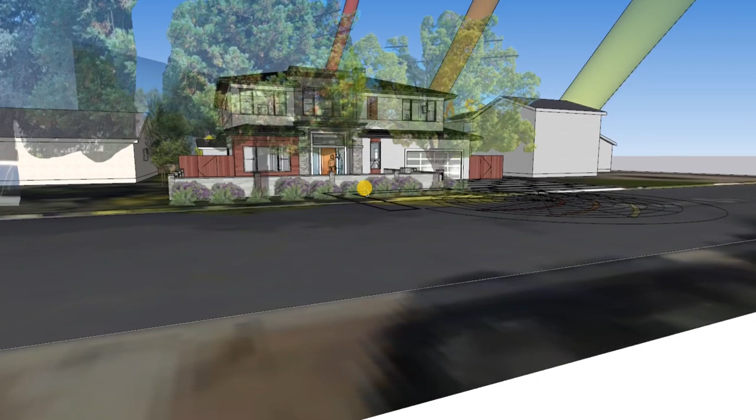So the front is relatively unchanged except for the window configuration. Per your request, I'm showing the window line you directed, and I think it's fine.

We've combined all the windows into sliders, except for at the mudroom where I had a casement. I'm now doing a taller window above a small awning window.

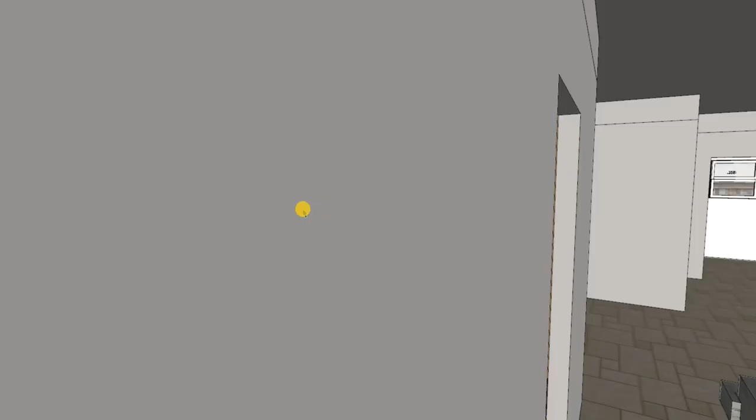So when you're inside the mudroom, and I know you said you wanted to make it a bigger window, I've gone ahead and made the window taller instead of going wider because I still do want to downplay this room a little bit on the elevation and let that mudroom zone be secondary.

The media room here has slightly taller windows than the rest of the bedrooms. These are 6 feet tall.

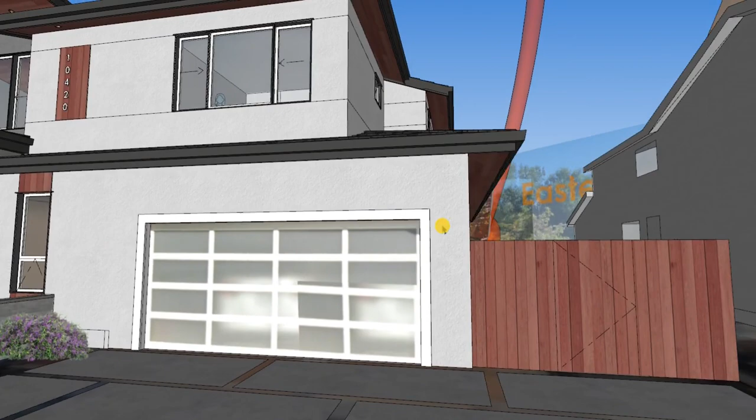No real changes here. I'm keeping the existing sliding window and the existing window at the kitchen.

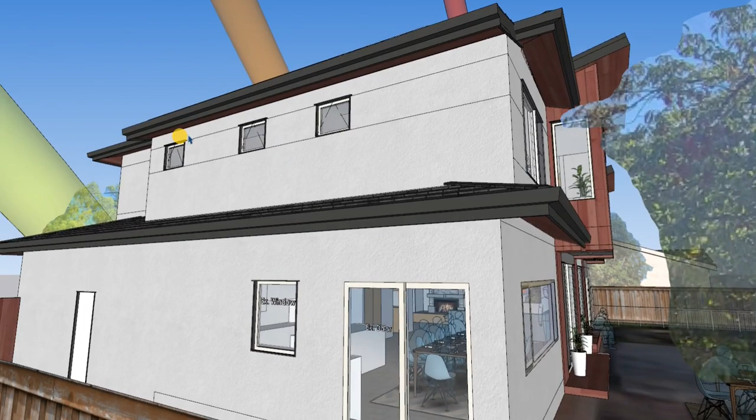These windows here have shrunk up a little bit to balance out the change at the closet. This window has shrunk down a little bit, and to keep things consistent in this bedroom, I wanted to bring this window height down just a little bit, but I don't want to go lower than 5 feet for the sill. So now, instead of being 30 inches tall, they're 24 inches. I think that's still fine.

Oh, let's back up a little bit, get a complete look.

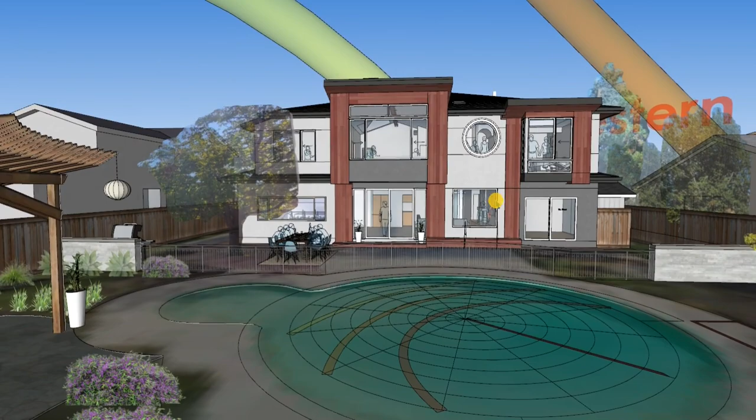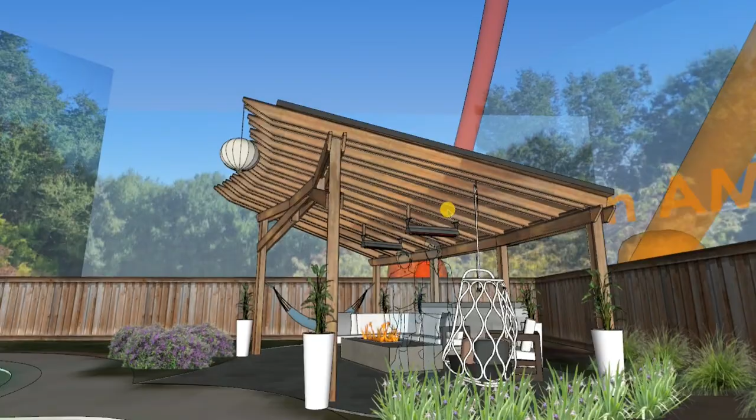So, no changes here at this curved pergola element. Still very awesome.

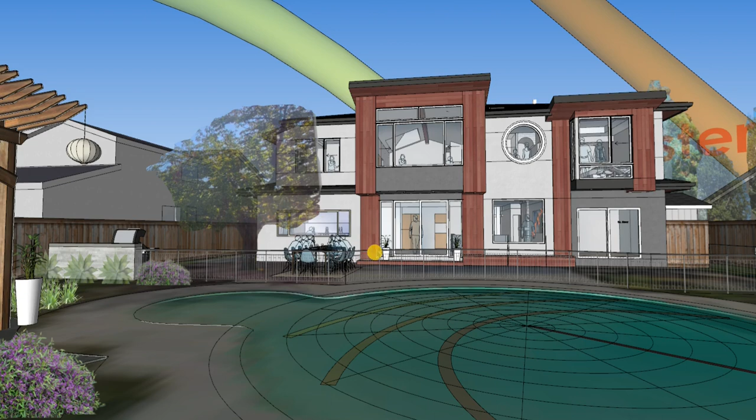And looking back here, the window design is both simplified and there's a lot more glass now, with some exceptions. So I'm showing the existing window here at the dining room. I don't see it looking great moving it up higher and building below it. I think you guys have indicated it's not an area that you're super convinced on needing to enlarge the glass at.

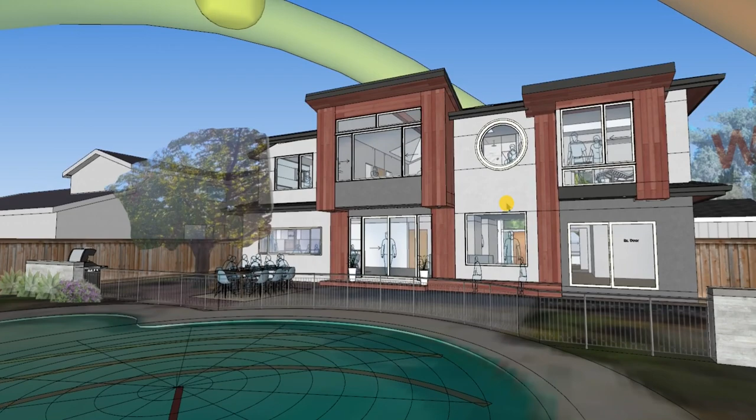So I'll show you what this looks like from the inside. But the other areas here at the downstairs living room, we have one big piece of glass. It's the biggest piece that the Tuscany line comes in. And this window at your bathroom is also the biggest 5-foot circle that they make.

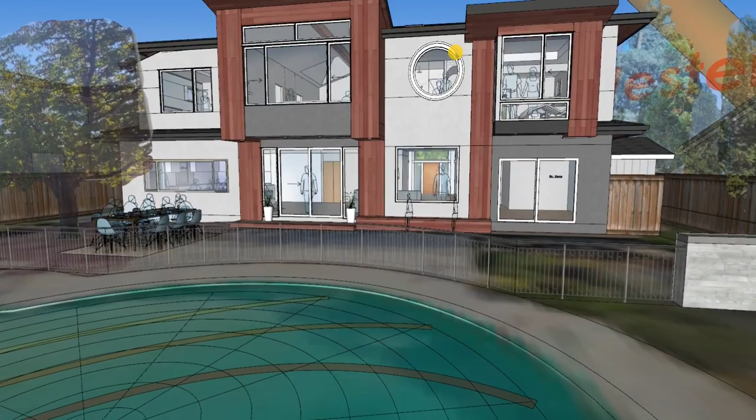And I think it looks fantastic. I started with smaller circles, but when I did the full 5 feet, it blows me away how awesome it is. Now, it is a fixed window, so we will be wanting to have an operable skylight here. But we'll take more of a look up in the bathroom later.

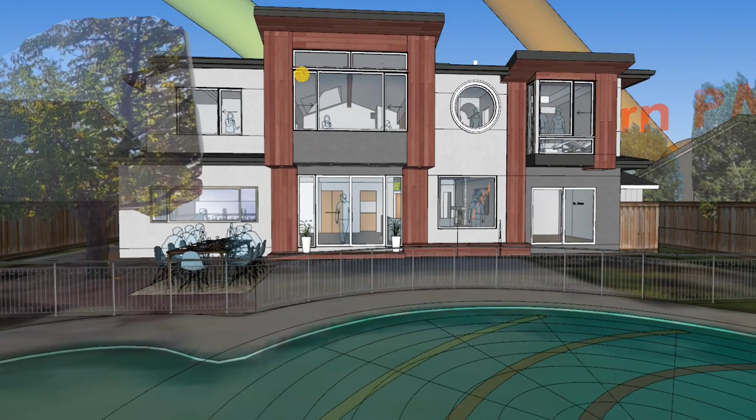This is the largest double slider available for the upstairs living room, with the largest available sliding patio door with some side lights on either side. This is the same width, 12 feet wide. This is 6 feet tall.

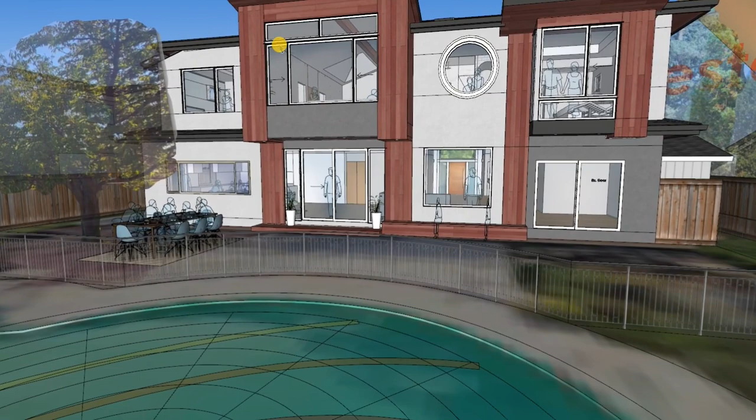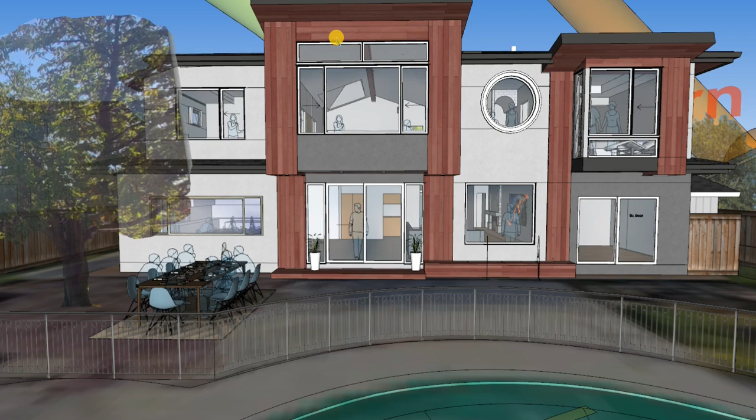And then I've brought that down to a 24-inch sill and then put 2 windows above. It seems like this is necessary that it be broken up into 2 windows. I'd love to see if we could explore the idea of getting it built as one piece, but I think that's just too big of a piece of glass for this product line. So splitting it into two windows here I think is okay.

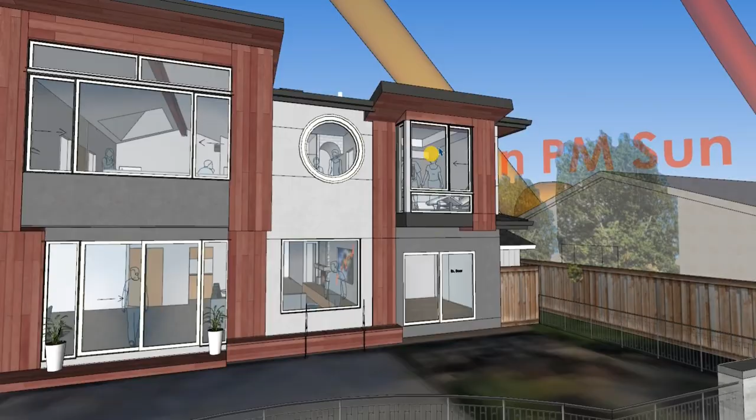And then not too much of a change at your master suite, other than the casement window has been changed to a sliding vent, a slider. And then I have done the treatment of bringing a small window down to the floor here still. So now it's only at your master suite that we're doing this treatment down to the floor. But I think it's worth it.

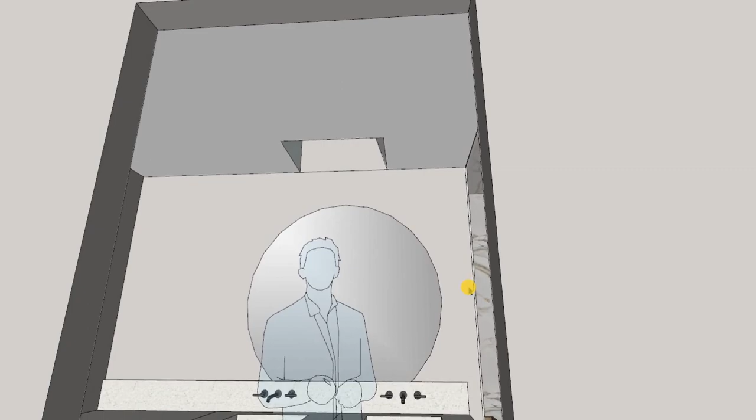And then looking into your master suite, just to give an idea of matching the circular window at the mirror for your vanities. And then if we do that, I feel like it's necessary to shift the skylight over to align here. That way, if we need to, we can crank open this window and get some ventilation happening.

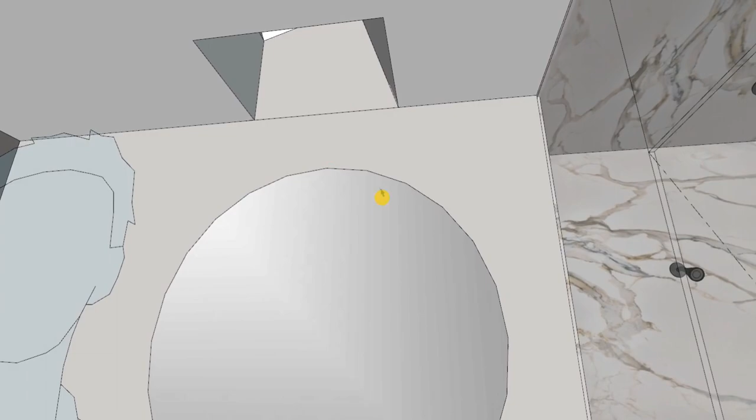Chiefly at this mirror that we might want to defog. Because at this size, and with this product line, this window would not be operable. This would be fixed.

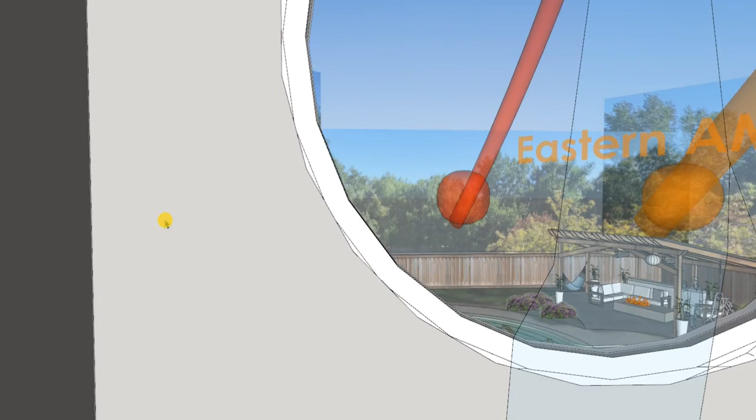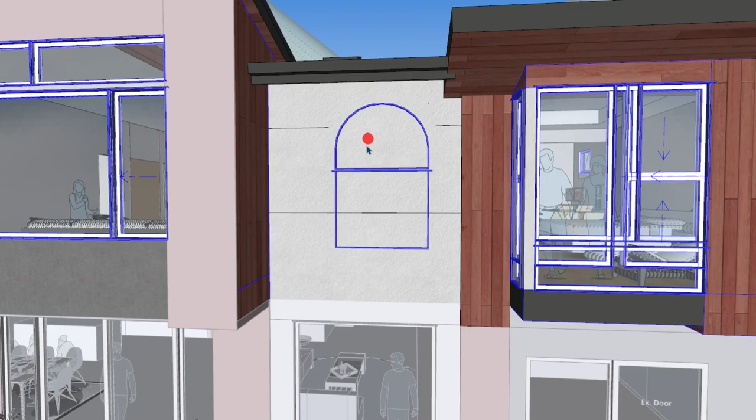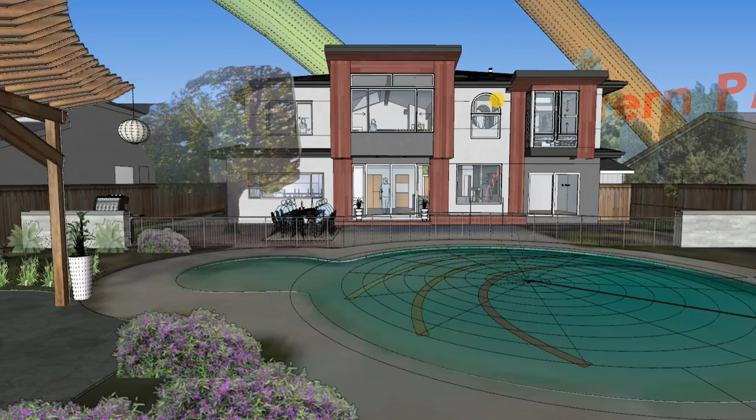Now, I did study doing some other window designs, something more inspired by... it's not perfect, but this isn't terrible. I don't have the inside wall cut correctly, but I'd rather see the full circle, to be honest. So I'd rather keep the circle here, rather than try to do a larger sort of combined window with an arch top.

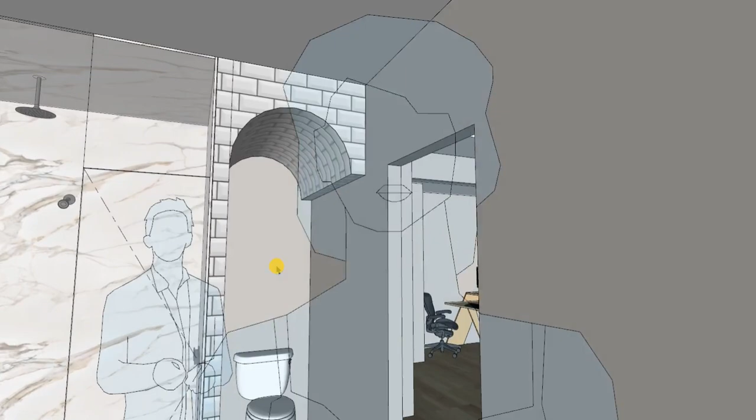Just for consideration, I think it might be really fun to do a little treatment at the shower wall. If we continue the shower wall tile around the corner and let that curve at the ceiling, this isn't necessary, but I think it might be a little fun, make this space feel a little extra special. But to be honest, maybe it'll remind you too much of a candy cane, so it's not necessary.

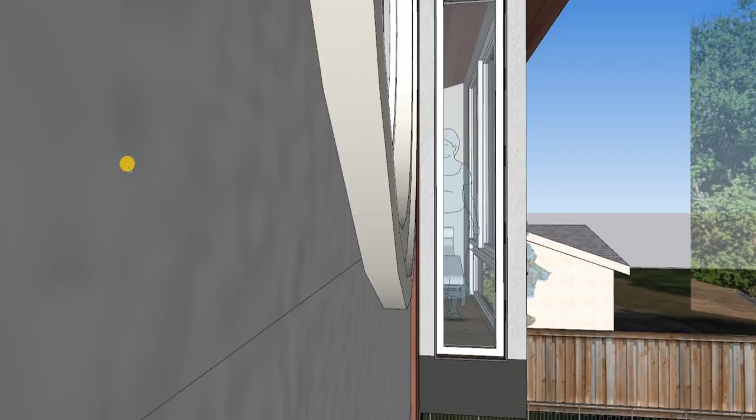But that change came about too, I think, just trying to bring the circle in a little bit more. Of course, we've got this fantastic set of circles reacting to your existing round pool already. But since you changed the skylight here, you asked me to. I think this is fun.

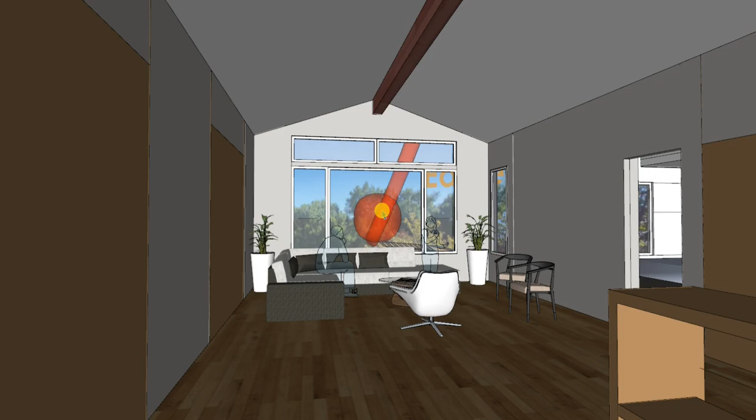Now let's actually continue around to the second floor living room, because I think you're going to really like the change here. I really like this new second floor living room space. It's a lot wider, a lot taller, and a lot more open. And to be honest, it's probably a lot simpler to build. The space has a lot less built-in shelving, but overall I think it has more glass, a simpler window system.

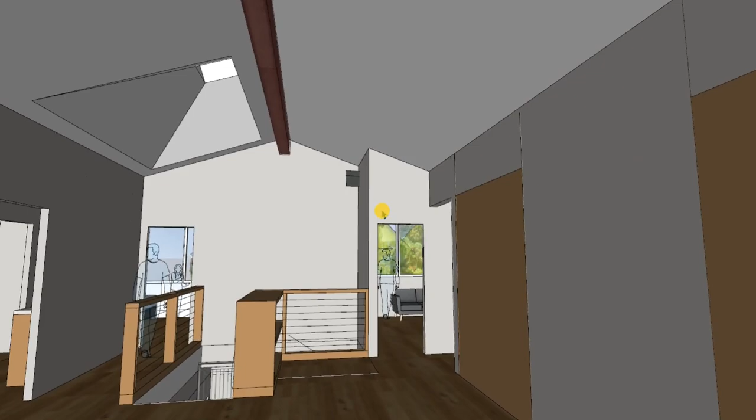I think it's a really fun opportunity to flare out this skylight so that when you're coming upstairs or coming down the hallway from your bedroom, it's just something really, really special happening here.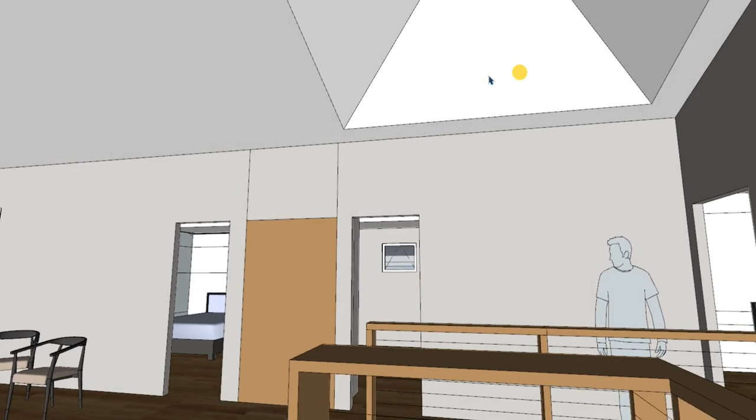So I think it's important to take a look inside this bedroom here. Now, I haven't finished all the interior walls, but this room feels okay to me. I think the trade-off of letting this be so open, because we shifted the closet, still feels to me quite appropriate.

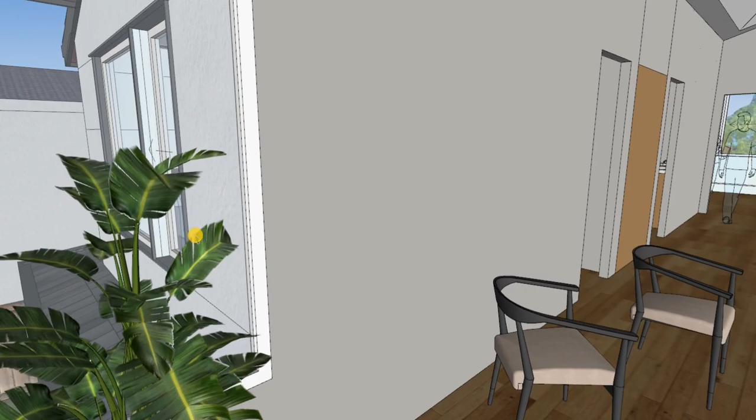And this bedroom still has a killer view, and a little bit of a view here to the window at the second floor. Now, since this has again gotten so wide relative to the original design, I do want to make sure you know that people can see into this bedroom if they're standing up against this window here.

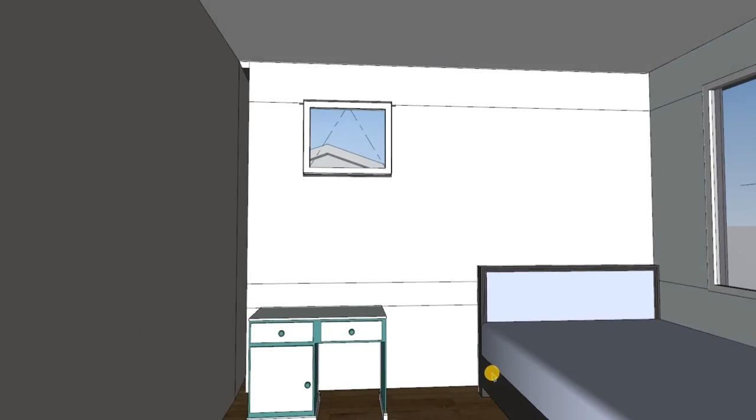This bedroom feels quite ample. There's a couple missing doors here on this closet wall. Quick peek in the media room.

Now, I haven't done the same thing where I've put a tall window above the lower windows, because given the proximity to the street and the fact that there's this roof here at the covered porch below, I feel like the right move is to raise the windows up. Keep it simple, raise them up. This is still, I believe, a 3-foot sill, which is quite normal, or 3'6", so it's 42 inches.

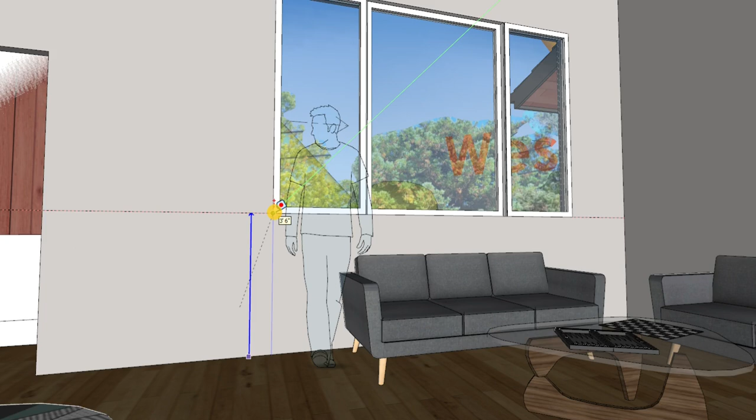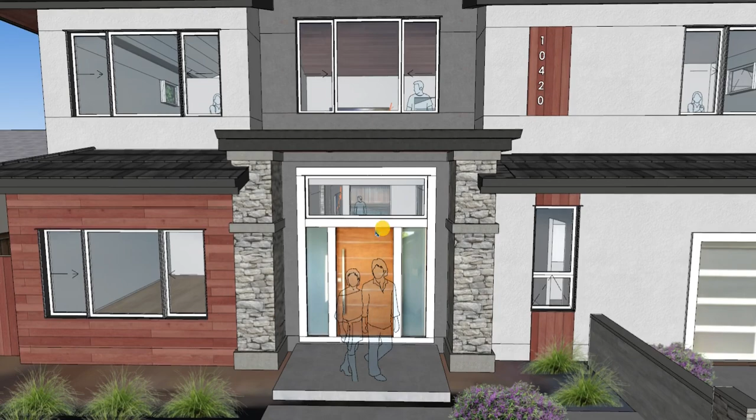So that's a little bit taller than I normally do in a bedroom, but trying to just keep things simple for you guys here. I think it feels right, or it feels okay to me. And again, from the outside, it feels right again. It doesn't feel cramped in, you know? And it's the tallest, widest—not widest actually, this could be wider still. I'm trying to match the window below. But again, I do think it's the right height.

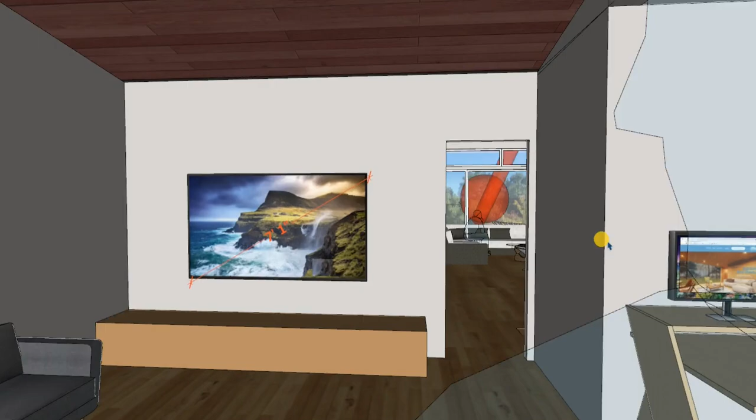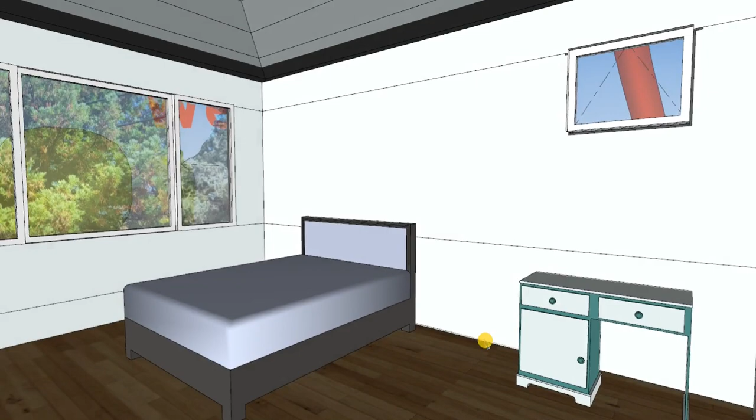This bedroom is not really modeled yet. It should just have a flat ceiling in it. Really nice view from this bedroom though, in the front courtyard area. I haven't cut it in through the roofing yet, but it'd be nice to have a skylight here at the end of this hallway.

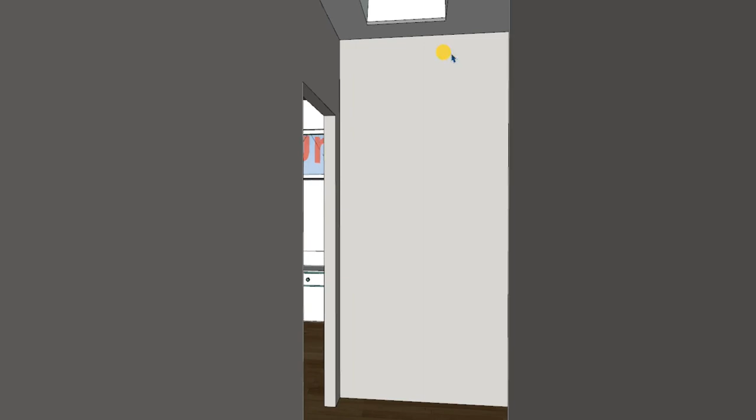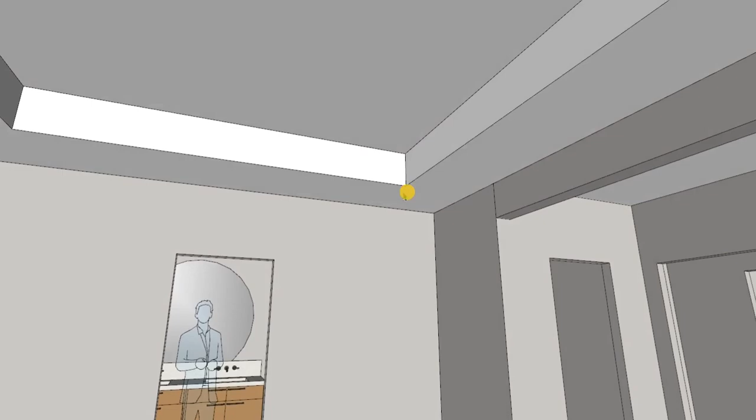A little office space here. And then, given the sort of unique shape of these spaces, I thought what I'd like to do in your master bedroom is let the office and the walk-in closet area be separated off with a little dropped beam element. And then that way, inside the bedroom proper, we can have a nice bit of clean geometry for a tray ceiling where this level in the middle raises up a bit taller than this level here.

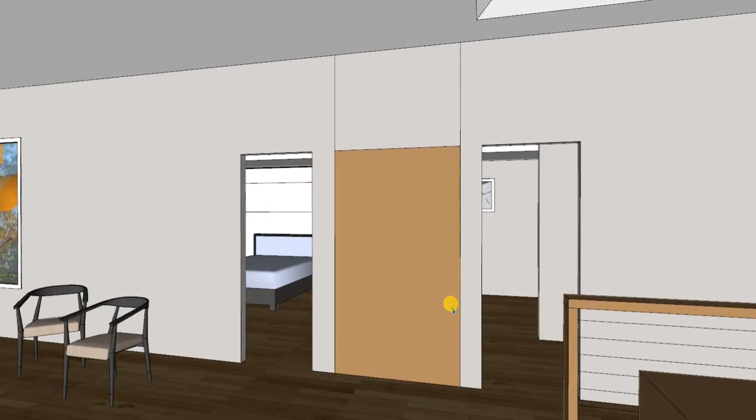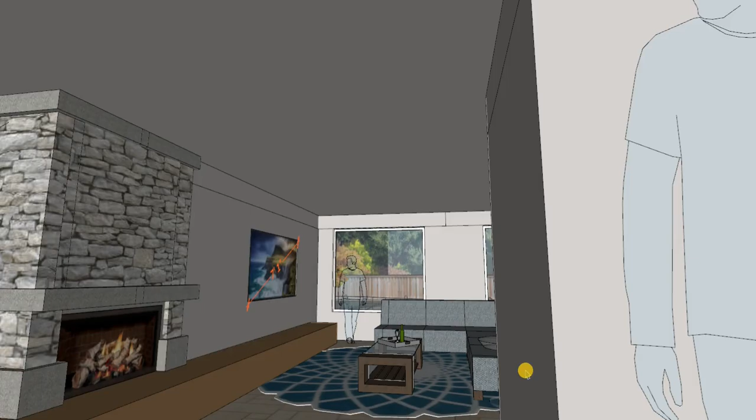All right, let's head downstairs because I want to show you some changes I'm proposing now at the area under the stairs. Previously we had a lot of awkward space under the stairs here. I would propose now, instead of doing this door here under the stairs, let this either be solid, or if

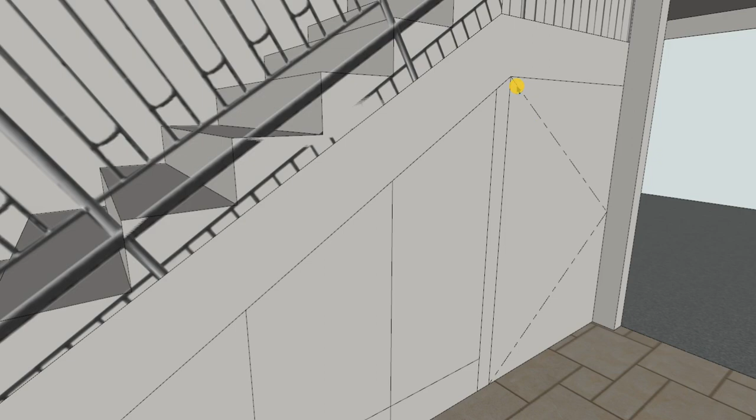there is going to be some storage here, let it be shallow. But then inside the garage area, let's just open up an opening in the wall here, fill in the area underneath the stairs, underneath the upper flight and the landing here. Wrap all of this in fireproof drywall.

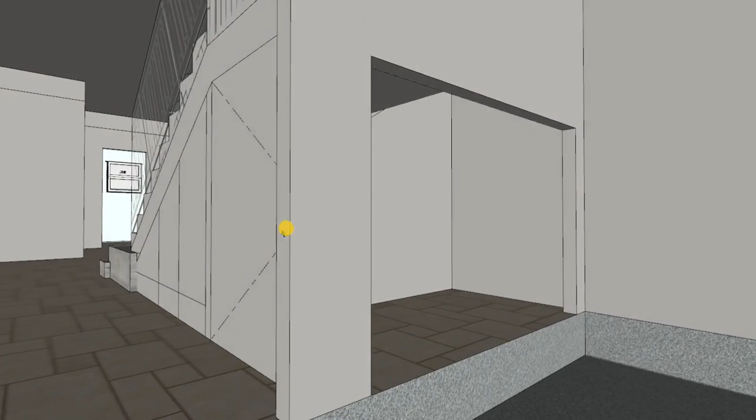And then the rest of the space, that's a huge open space. It's not very tall—only about a 4 foot tall by 6 foot wide opening here. And you could put some storage on, access under the stairs here.

But this is a door area. This is already kind of busy. And these are going to be storage for underneath that area.

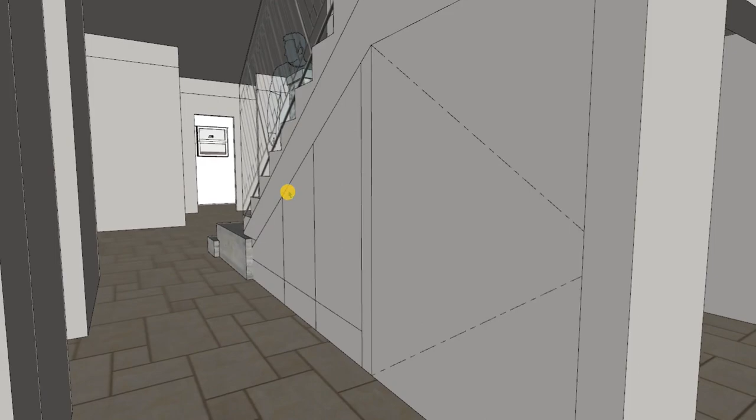I don't know, the stair storage—I'm not quite sure what you want to do here. But this would probably be the simplest. Let this area be open from the garage.

And then if you still feel like you want to have some storage here, this could be some sort of pull-out storage that comes out on roller tracks.

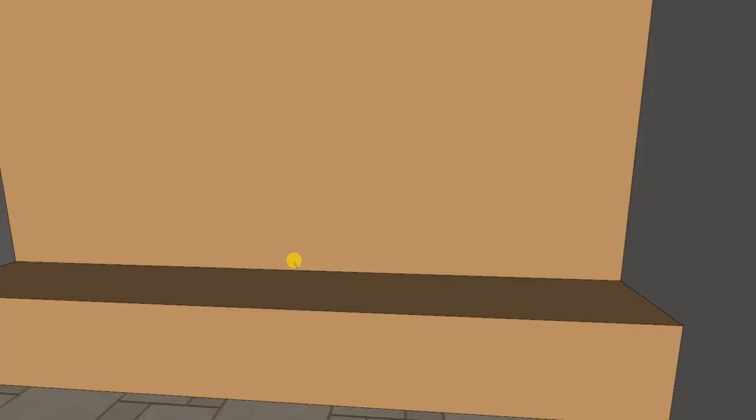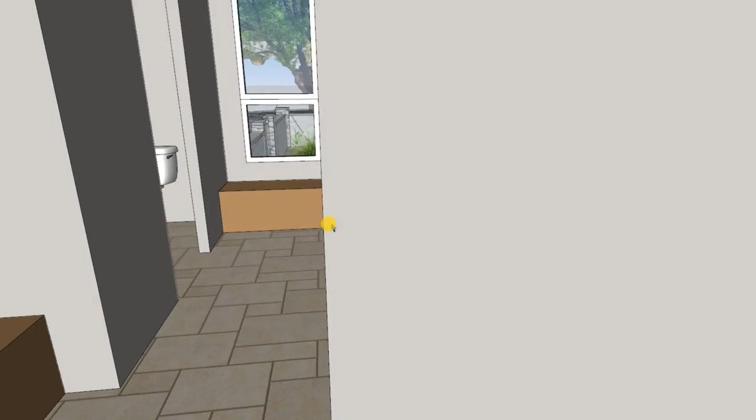But I do think it, with all of this space in the mudroom, with this full row of maybe locker-type cabinets with storage below the bench on this side—and don't forget there's this little area too.

I don't know, maybe this doesn't have to be so complicated. It could just be more overflow storage from the garage side.

But then in the pantry area, instead of trying to get at any of that area behind this new pull-out pantry, and just on the other side of this is that half-height space that opens into the garage—instead of trying to do anything fancy between these two spaces, just do a U-shaped pantry.

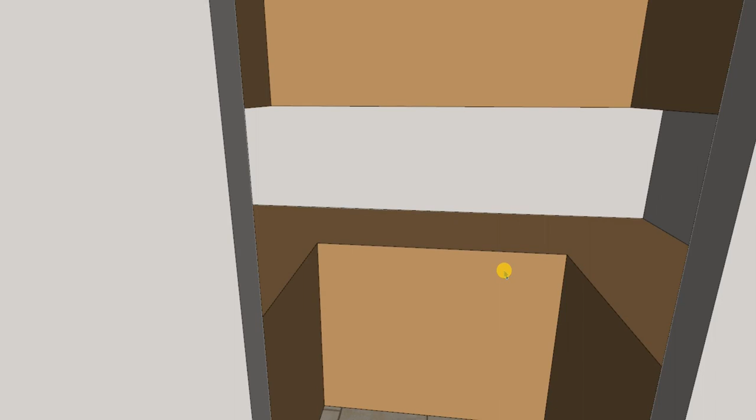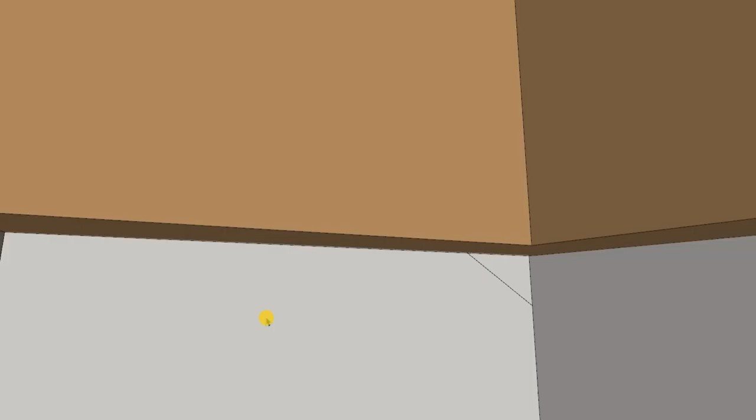You step in here, it's just a hair under 4 feet wide this way, so I think it's like a 3.5 by 3.5. Think of it that way—a 3.5 by 3.5 floor space here, 2 foot deep counters all around, and then 12-inch deep either cabinets or shelves, U-shaped all around here.

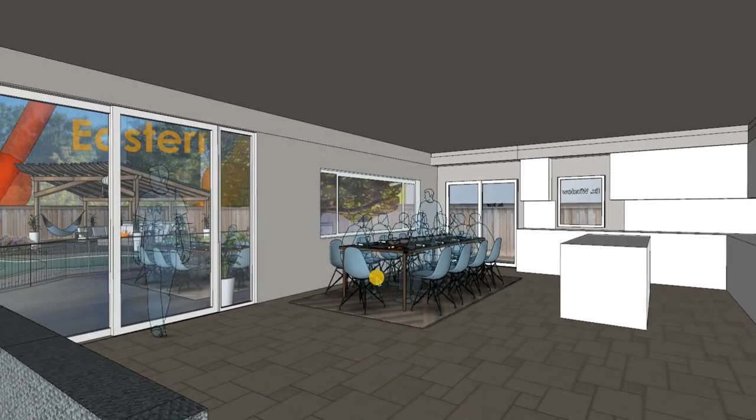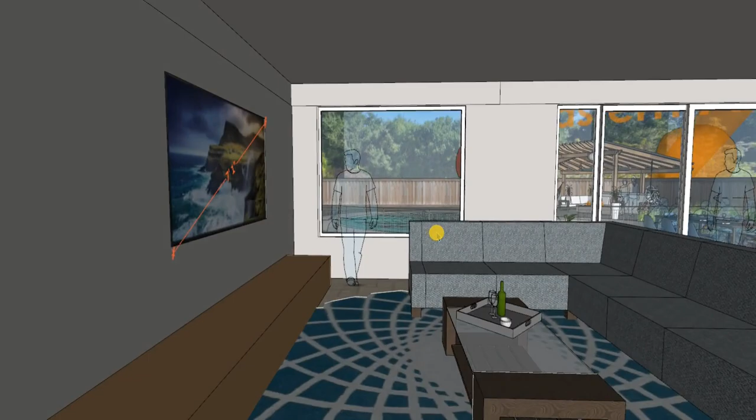And then here at the dining area, that's now 9 feet tall, we've got this max width sliding patio door with some side lights, and we've got this really big window here. I still think it looks very open, and it's okay to me that these are at a different height at this area.

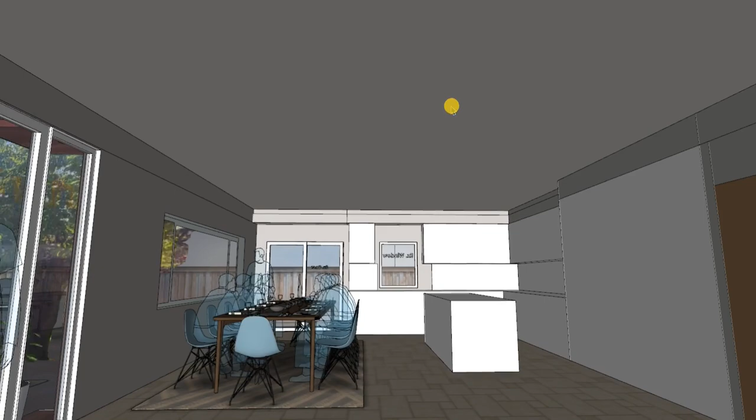It almost makes part of me want to say, do we need to make this whole area taller? Do we want to do some sort of treatment here at the ceiling to differentiate the kitchen? Or maybe we just get a really nice wide chandelier element here above the dining table.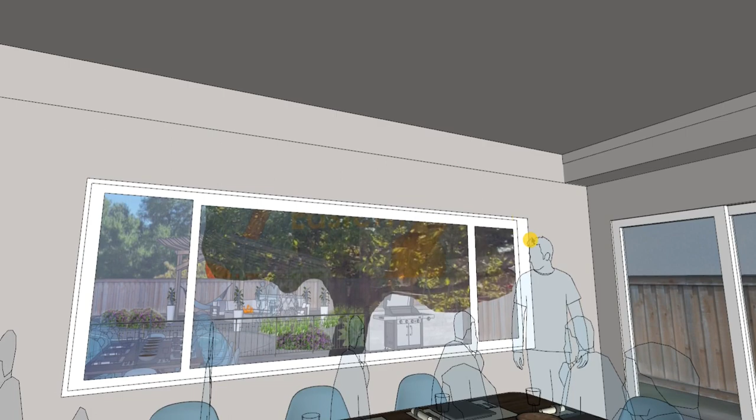But we don't need to replace this window. That move from me came from trying to make everything casement window. But I get we want to do sliders, and I wanted just to bring in just this much more of your cherry tree.

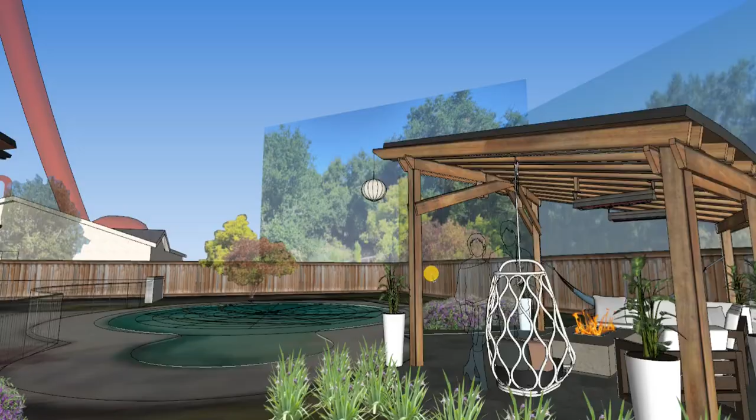Let's just go through the house one more time.